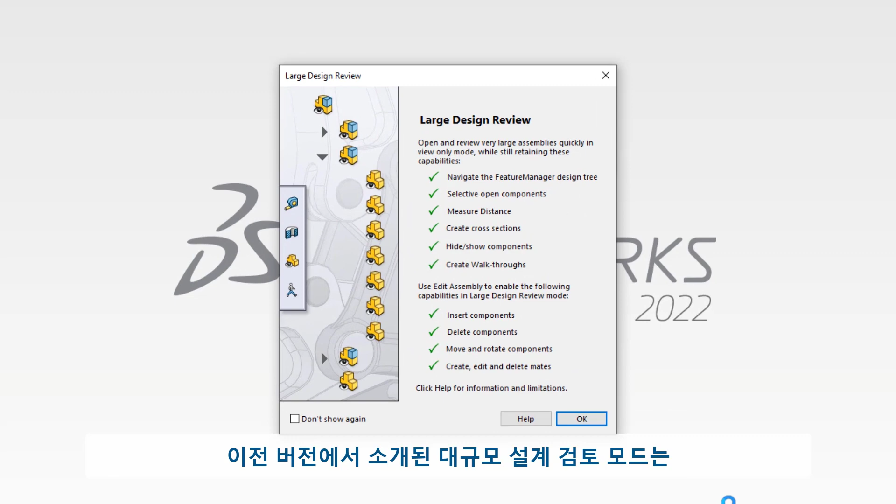SolidWorks 2022 offers faster ways to access your designs from the start. Large Design Review Mode, introduced in a previous release, provides a lightning-fast way to open your large assemblies with very few limitations. The large and complex 6031 component Nemo submersible from U-Boat Worx opens in merely 13 seconds, allowing you to get to work faster.

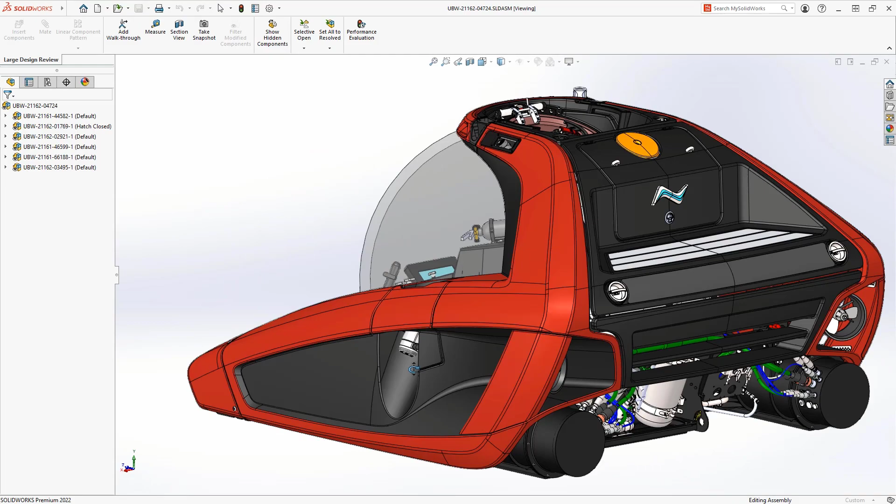New for 2022 is the ability to easily open drawings from a large design review assembly in detailing mode from the right mouse menu. Detailing mode is an extremely efficient way to both open and work on your existing drawing documents. Like opening the large assembly of the Nemo, the drawing is opened rather quickly as well, in only 21 seconds.

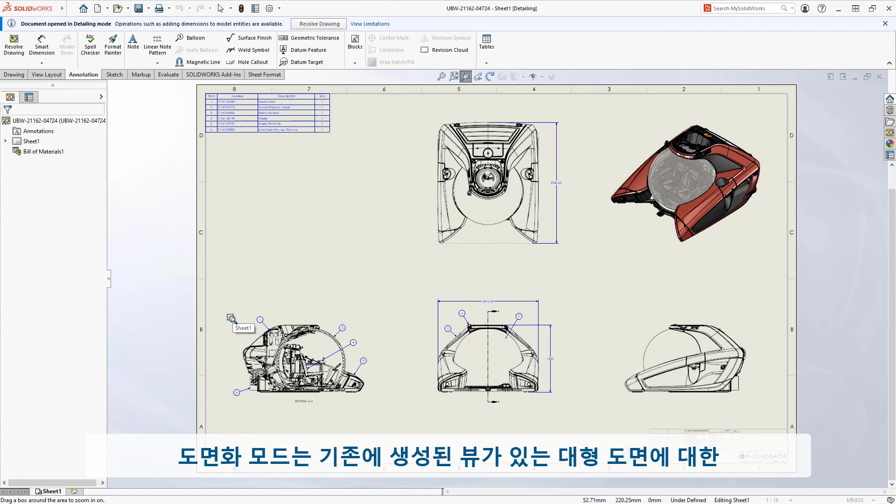Detailing mode is a fully interactive way to work with large drawings that have already had their views created. In this environment, you can continue detailing your design, adding dimensions, notes, tables, and more. The ability to quickly access drawings from large design review mode in this way will streamline how you work with large, complex designs.

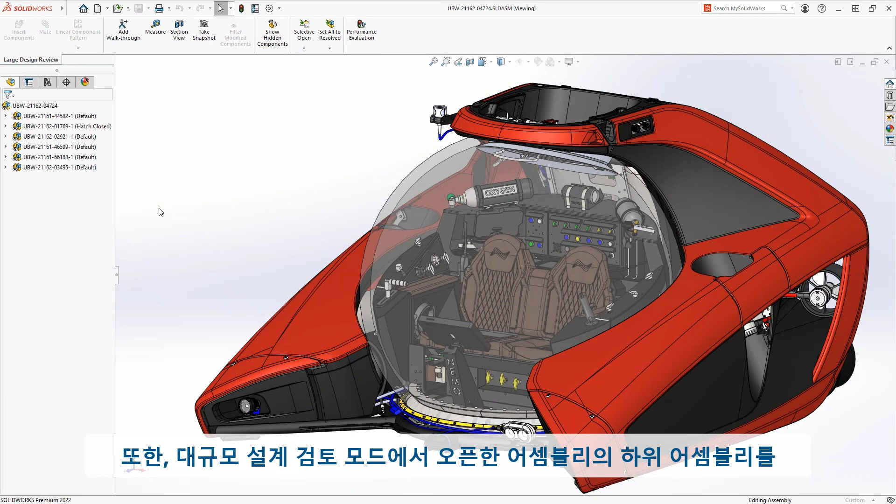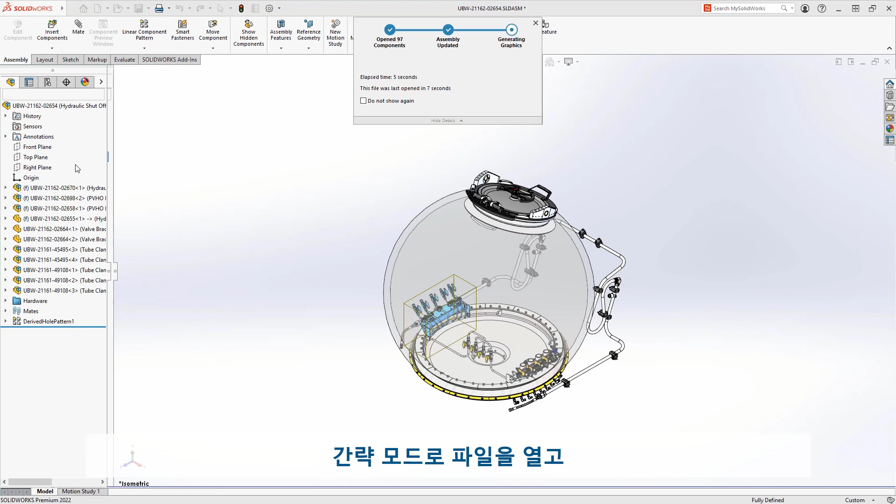Additionally, in 2022, you can open sub-assemblies from large design review mode in this lightweight format as well. This ensures that you're not loading any unnecessary information that's not currently needed. Whenever you want access to the fully resolved models, you can choose to open them from the same right mouse menu. This ability to access lightweight files and quickly switch between them will ensure you can work in the most efficient way possible.

Moving components is now easier in SolidWorks 2022. When selected from the Feature Manager tree, you're now presented with a triad that makes it extremely simple to get a component into just the correct spot, with controls for X, Y, Z, and rotation all at your fingertips.

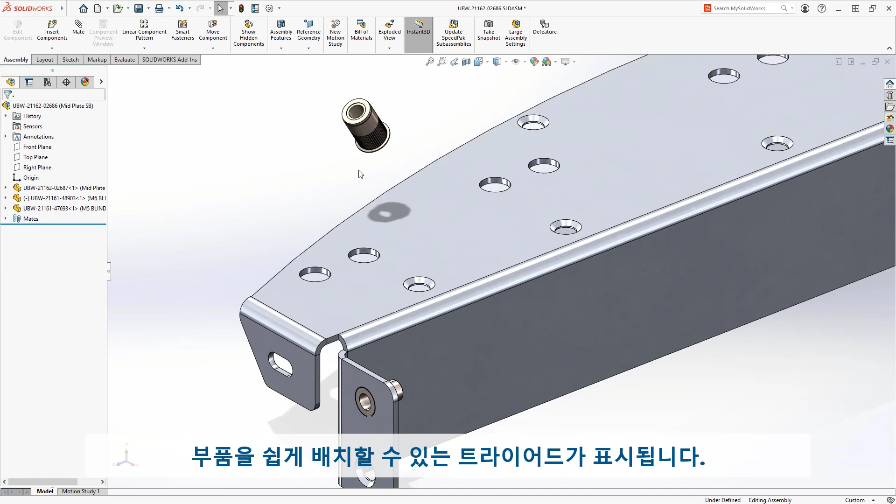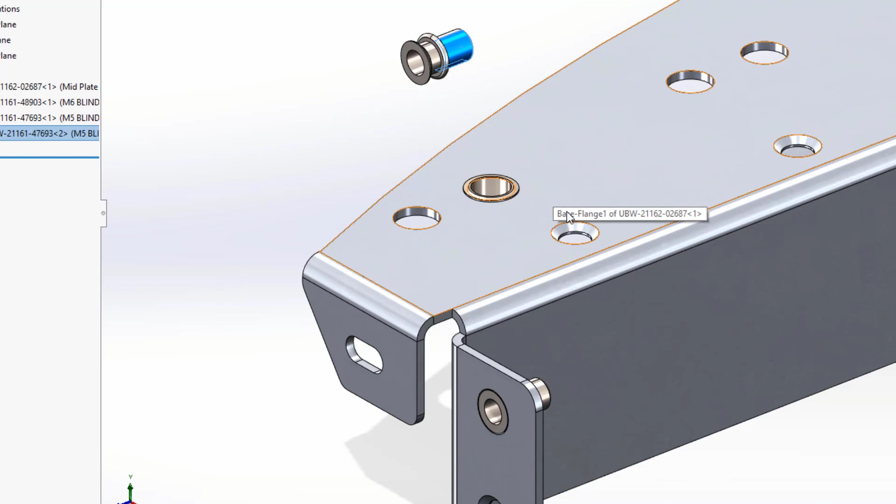The Quickmates toolbar in 2022 also gives you more control by presenting you with the option to make adjustments before adding a mate, such as the alignment. This is also true when adding circular type mates, where you will be given the opportunity to lock the rotation of them before confirming. This is especially useful in the case of mates that allow both of these conditions. This new ability to add this extra control while mating with the Quickmates toolbar makes it fast and simple to quickly build your assemblies.

The intelligent pattern-driven component patterns get even smarter in SolidWorks 2022. When you choose a component to pattern, SolidWorks will always choose that component's location as the seed for determining how to create and position the other instances. Even if you change the location of the component to a different location, the pattern still assumes that the component you are patterning is in the seed position.

This means it's much easier to take advantage of existing patterns and hole wizard features to quickly position multiple instances of components, such as hardware, and rapidly populate your assemblies.

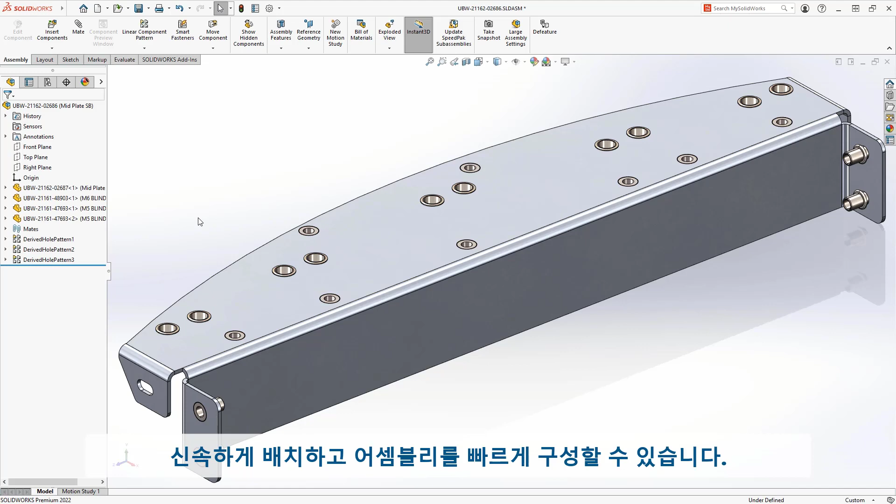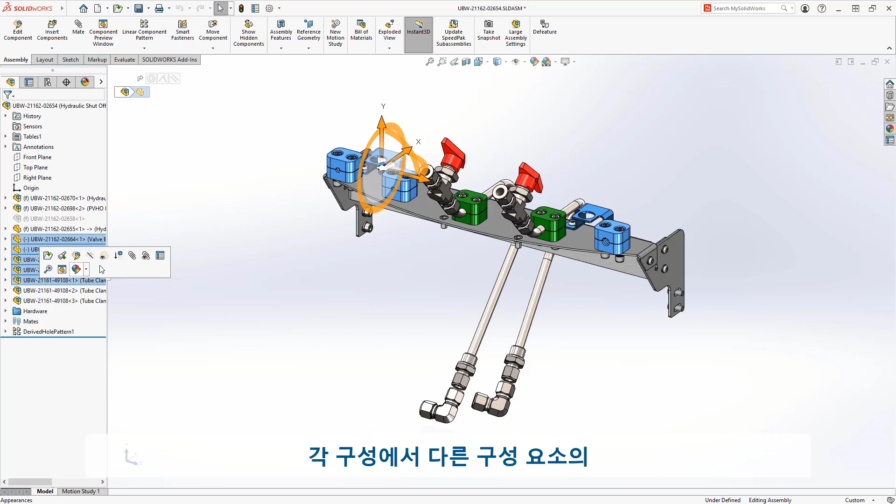Configurations are a powerful way to create alternate versions of parts and assemblies all within a single document. You can choose to have instances of components included or excluded from different versions of the design. You can also choose to use alternate configurations of other components in each configuration. The possibilities are endless, and as more variations are made, keeping track of this can get complicated.

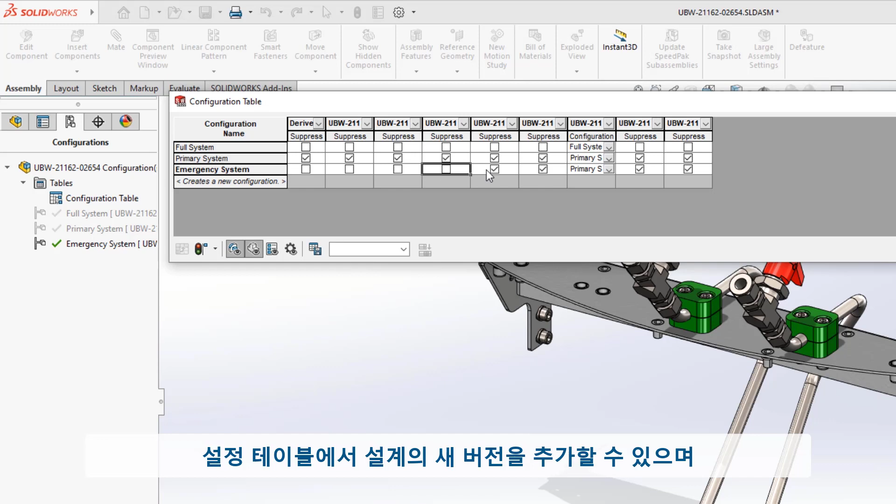However, new for SOLIDWORKS 2022 is the new configuration table. This table makes it much easier to both create and manage configurations. From the table, you can add new versions to your design, and you can also choose to toggle the suppression state of different components on and off. Likewise, you can specify which versions of components to use in each configuration.

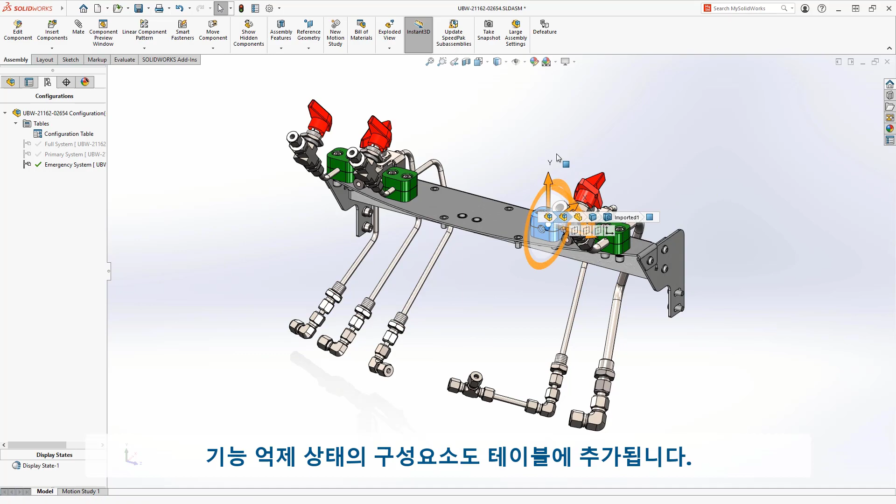The controls make it easy to see your changes as you're working as well. If you make changes to the configuration manually, such as suppressing components that weren't included before, they will be added to the table as well. The configuration table also has filters to make it easier to focus on what's important. For example, you may want to ensure that the custom properties for each configuration are unique to each new version of the assembly.

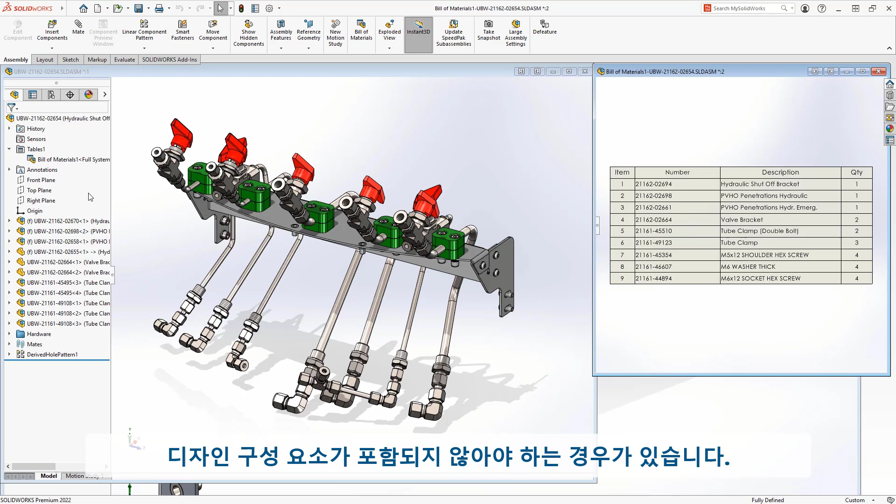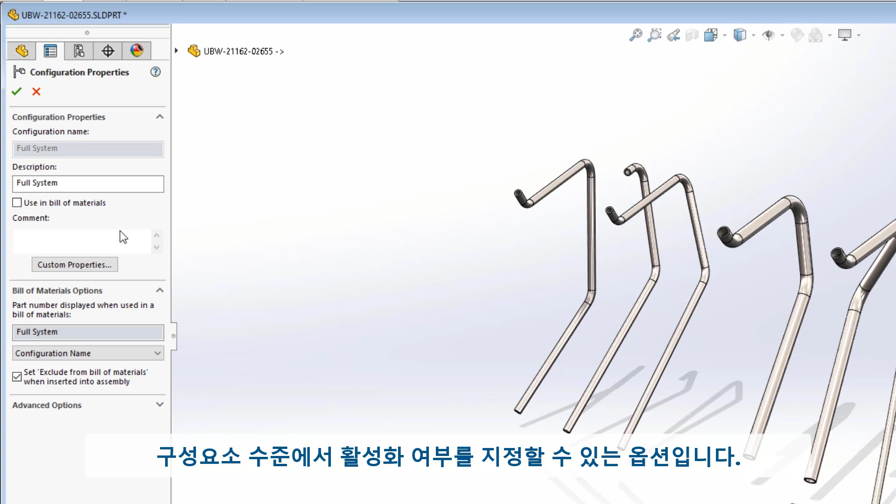Finally, when looking at a bill of materials, there will be cases when components in the design should not be included. This option can be controlled from the component properties in the assembly to specify this. However, this can become time-consuming for parts that regularly should not be included. New for SOLIDWORKS 2022 is a new configuration option at the component level, where you can specify that a component should have this option enabled by default, saving you the time from having to change this each time the component is used.

SOLIDWORKS 2022 introduces a wide variety of performance and usability improvements to ensure that you can focus on the engineering of your designs and less time determining how to manipulate them.